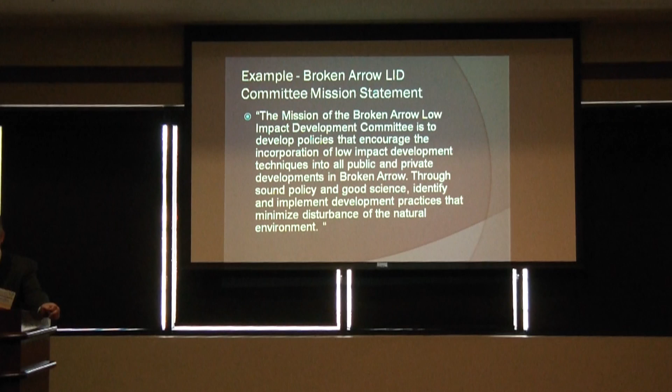So our committee got to work trying to narrow down hundreds and hundreds of possible LID practices down to 10 or 12 that we might want to emphasize a little more on the local level. The committee decided that a voluntary LID program for developers, with a local green certification and community acknowledgement, would be the way we'd look at it within the City of Broken Arrow.

Different Phase 2 communities may come up with their own emphasized practices and incentive programs. So in Oklahoma anyway, each community kind of goes its own way. That's a little tough with us, and that's why I really like to see a lot of the different communities participate in events like this - really good to look at it collectively as well.

Some things about our certification program: it's a voluntary program for developers, property owners, or even homeowners associations seeking LID certification. As mentioned earlier, with a lot of existing development you not only need to look at what you're going to do for new development from here on out, but maybe even retrofitting or getting existing homeowners associations and groups really looking at how they maintain their open space. So it's for both residential and commercial, existing or proposed.

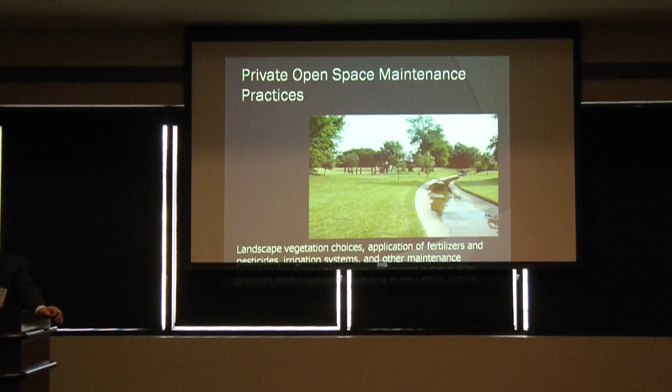Private open space maintenance practices - how do you handle that landscape? How much fertilizer do you apply? What pesticides do you use? Do you have low use irrigation systems? Those type of things - how you maintain the open space you have is a very important part of LID.

One thing in Oklahoma we all have a fairly good grip on, it seems like, is flood control. We have stormwater detention ponds - almost every new neighborhood has these, or we have large city regional ones. What can you do with them to help water quality as well?

That's one of the challenges engineers need to really look at. Do you have underwater aerators, pond fountains, pond forebay areas - things of that nature where the pond itself can really do some stormwater quality benefit as well as flood control.

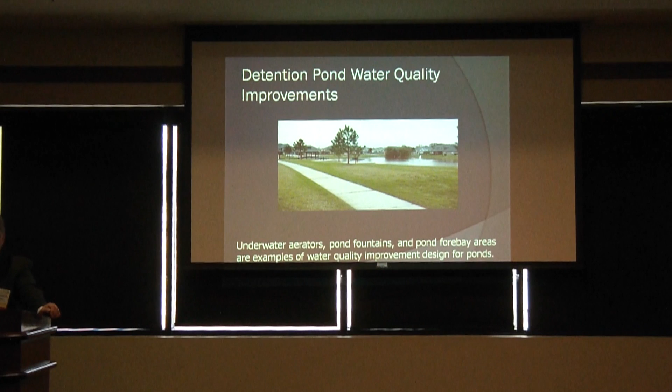Vegetated swales, another implement of LID. They can slow down the overland velocities, they act as pollutant filters, and they can add some open space to neighborhoods. One thing you really have to look at is making sure the designs are maintenance friendly to the owners, so you don't have standing water or nuisance or code enforcement issues created by this.

A big thing we look at that is always a big issue for those on the municipal side is when you have a very large tract - 40, 60 acres - cleared all at one time, scalping the whole site, clearing it, and then trying to manage the silt from leaving that site during construction.

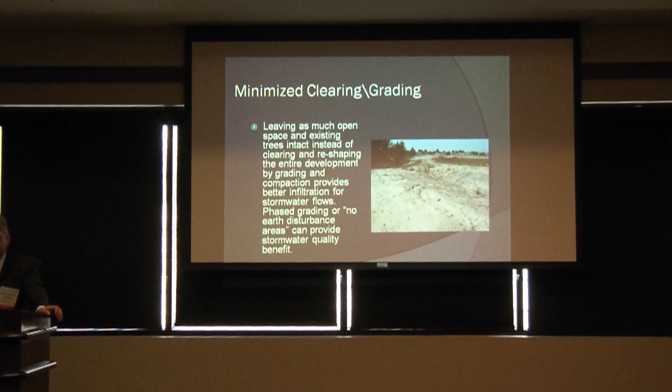So if you can do some things to phase projects so you don't disturb all the land at once, do some no-disturbance areas, and if you can try to leave some clumps of trees long term, that's a good thing to do as well.

Good housekeeping during construction - how well do developers and builders react to the pollution and erosion control changes to the plan? Here's an ugly picture from a Broken Arrow project where the development had tiers and tiers of silt fence, but you can still see the stormwater looking like chocolate milk draining right down to the storm drain. So when that happens, that has to be cleaned up.

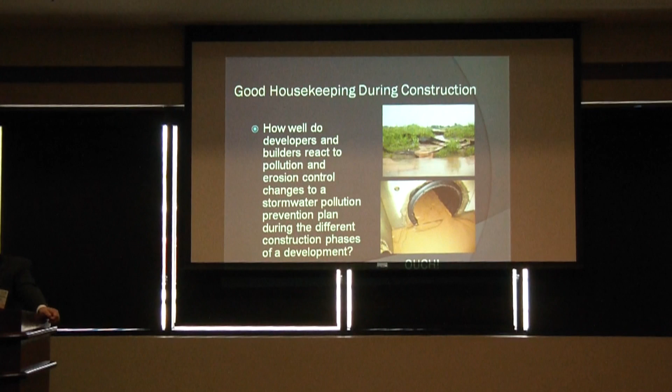So we just need to really look at some things you actually do during construction - it's a very critical part of this as well. Broken Arrow has a lot of construction going on at all times, so that's a really big deal for us.

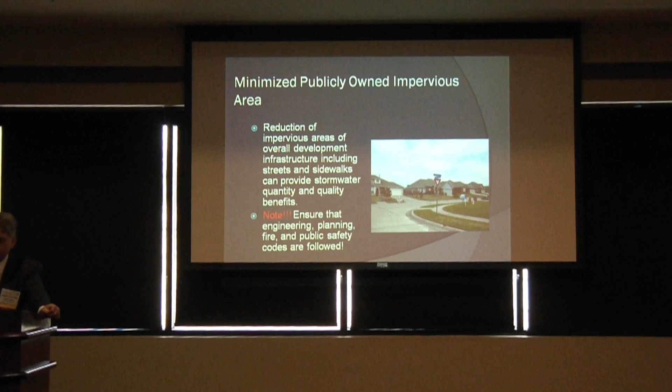A lot of what was presented before was about reducing impervious areas. That's something we really need to get a handle on for new developments, things such as narrower street widths. Broken Arrow has a code requiring sidewalks on residential developments unless it's a private gated community, so you've got to figure ways to reduce impervious area within the public right of way or on public facilities. We're looking at narrower street widths as a possibility, and we do have that capability within our LID practice manual.

One thing the city has done, even on public projects, is shown here: a roadway we widened 3 or 4 years ago, Lynn Lane, about 5 or 6 miles south of here. Instead of the standard 50-foot wide 4-lane width, we squeezed it down to 45 feet, which works out to about an 11.5-foot traffic lane instead of 12.5. I'd like to say it was for stormwater quality, but honestly it was to try to squeeze down the right-of-way purchase you have to make when you widen roads, dealing with landowners for that extra right-of-way. It can get very expensive, so reducing street lane widths can have other benefits too, like less pavement to maintain over the roadway's 50-year life. So there are a lot of benefits if you can squeeze just a little impervious area out of the roadway.

Then there's the issue of privately owned impervious areas. A lot of these categories are covered in our practices manual as things you can get credit points for. For private residential subdivisions, you often have walking trails, private driveways, homeowners association parking areas, and other private impervious areas. There are things that can be done to reduce the impervious area or improve the stormwater quality benefits. A pedestrian trail would be a great opportunity to experiment with pervious pavements and things of that nature, so that's something we're really wanting to encourage.

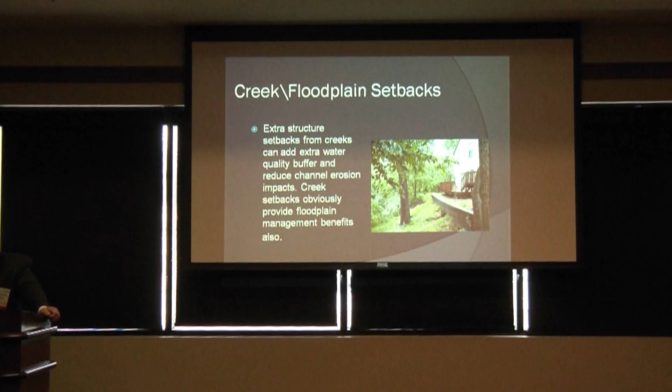Impervious surfaces disconnection. If you do have impervious area on the development, try to disconnect it and not tie it right to the street, then right to a storm sewer, then right to a paved flume and then right to the creek without it ever touching a piece of grass. Get that roof drain going across the vegetation somehow, some way.

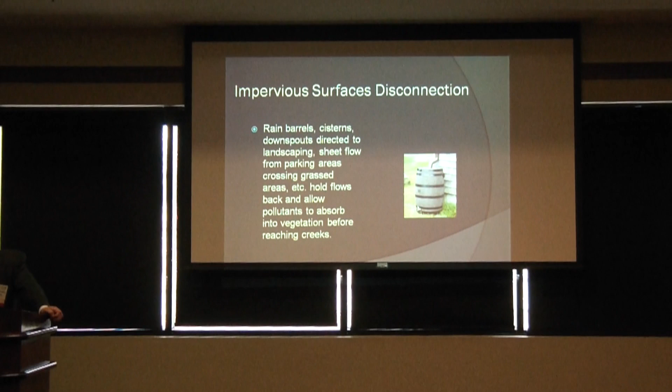Do some things like rain barrels or cisterns to try to reuse some of that water, possibly get it back into the ground instead of watering your yard with tap water that's treated at the water plant. So you can do some conservation things as well that help not only stormwater quality but also water conservation, which is becoming bigger and bigger.

Trees: tree preservation, planting, and landscaping. The arborist will really tell you there are economic and social benefits of having trees on a development. So if you can save trees that are on a site and design around them as much as you can, that can have a great benefit.

If you do have to take most of the trees out on a site development, if you can replant some, it can really have some good air quality benefits, just aesthetics. This can really add some value to the land if you make sure you have a good tree program.

A lot of cities do have landscape requirements, and this is the kind of thing where a lot of developments are already doing types of things like tree plantings or landscaping, but we want to give them some stormwater quality benefit points for this certification, so that's an important thing to focus on.

Of course, rain gardens, bio-retention filters—there are a lot of presentations here today that will mention those. They can be on a very private, individual lot level, or they can be larger rain gardens that take a little bit more concentrated flow, possibly from street systems and such. But emphasizing draining that stormwater through systems like this to really help the pollutant load drop is a good thing.

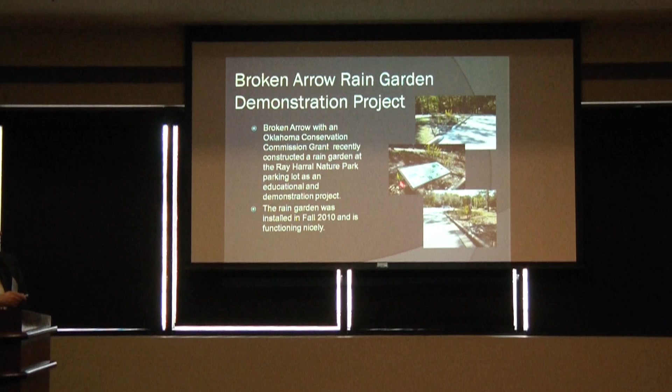There actually was a public education component to it. We got some signage up there since this is a nature park, so it gives an educational process to it as well. It's a really successful project, and it's functioning very nicely.

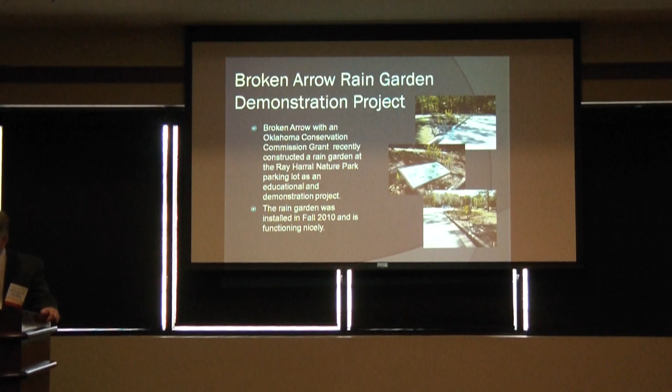One thing a lot of us municipal folks have is stacks and stacks of brochures—all these stormwater quality brochures. One thing that could be beneficial is a good system to get these out to new homeowners. If a new subdivision came in and wanted to be green certified at the subdivision level, you could maybe have a system where each new homeowner got a stack of these stormwater quality brochures and things like that.

Some things like to distribute even a bit more of the education—not just brochures, but other methods as well. Just educating the end users of the development on the importance of taking care of your open space, and the implications of things you do on the homeowner level, like washing your car in your yard or picking up your pet waste or things like that. Just getting a little bit more of that aha moment in some people's heads could really help out.

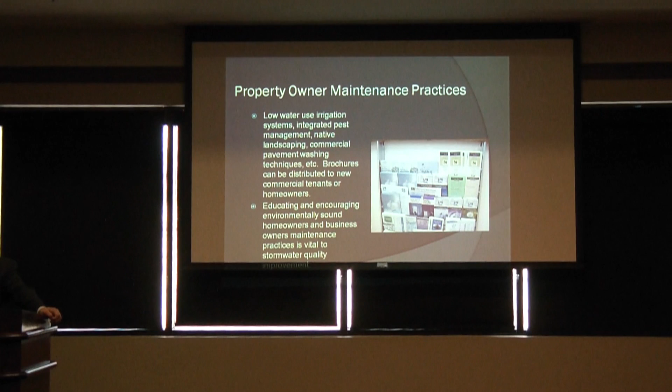Good housekeeping during construction—we'll give a little bit of extra points if you do some things above and beyond the DEQ minimum requirements. Just a little extra, maybe reporting of inspections and things of that nature, to try to get a bit more professionalism, a better grip on the construction site, siltation, and erosion control.

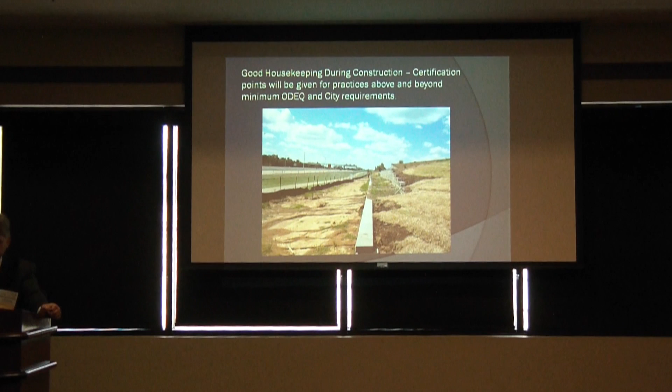Open space maintenance practices, not only on the residential side, but even on the commercial and business side of things. How do they pick up the trash on their side? How much fertilizer and pesticides do they use? What kind of irrigation systems do they have? Do they have material storage that can be an issue? All different kinds of things on the commercial and business side can also affect the stormwater. So we wanted to write this practice for not only residential but commercial and all types of development that have different issues.

Low water use irrigation systems can have some benefit for water reduction and conservation. Less steady flow of water running right down to the creek, or wasted watering rolling out to the street, things of that nature. Try to get people to look a little better at their irrigation systems for their lawns and landscaping.

Find ways to reduce tossed and blowable trash. You hear a lot about pollution, but even just the trash that blows around from commercial areas can be a big deal. I deal with floodplain management all the time, and I meet with creek owners who say, why should it be my job to pick up the trash that people dump, when it flows into the creeks and lands on my property? Well, it landed on your property, it's your problem. Realistically, I don't know a great solution to this, but there needs to be more thought given to trash collection where it's scattered, especially in commercial areas, so it doesn't all flow right down to the creeks, where as we know, it really does end up.

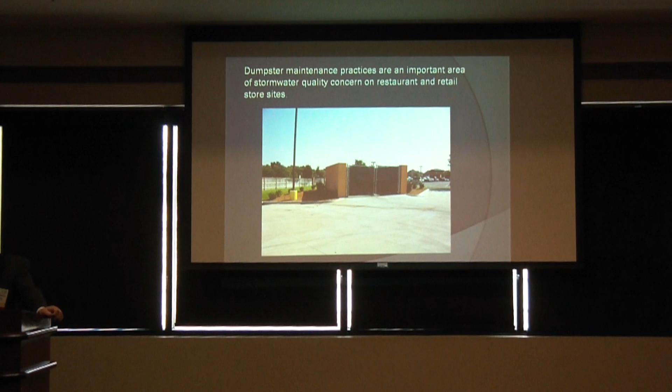Dumpster maintenance can be a big issue. I do all the development reviews for stormwater here, and I always look at where they're going to put their dumpster. I've seen a few where they say, oh, I'll put the storm inlet right by this dumpster - no, that's not a great idea. Let's try to get a little common sense about the side impacts of where the trash dumpster is, where the grease traps are, and other issues that can impact stormwater. Try to get them thinking about that kind of thing.

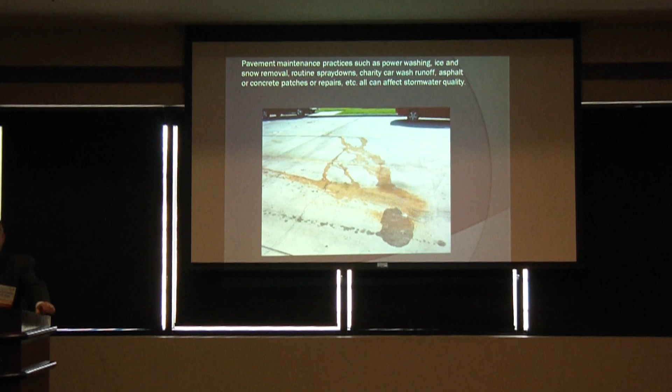Pavement maintenance practices - power washing, ice and snow removal, routine spray downs, charity car wash events, asphalt patches - a lot of those issues. If you just get owners educated a little bit about some of these issues that can have stormwater impacts, that can really help out.

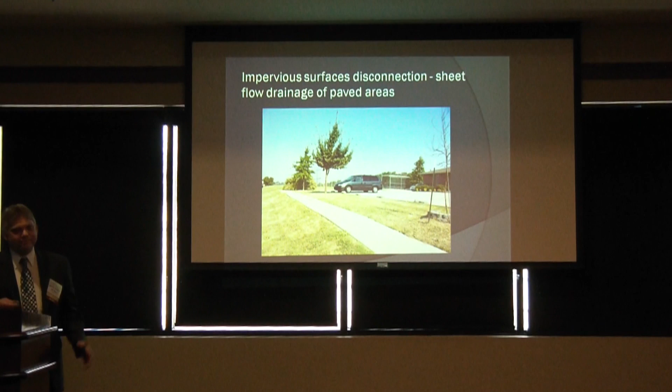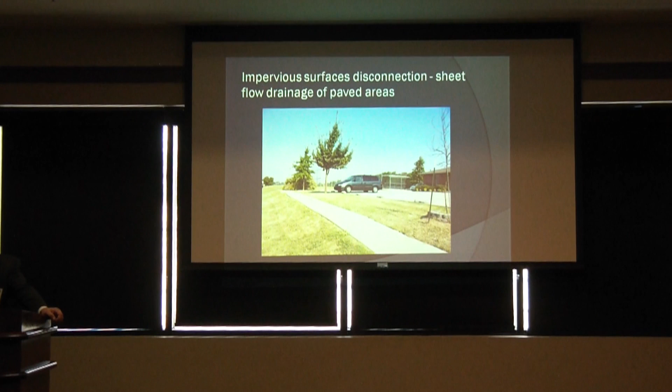Impervious surfaces disconnection - not only can this apply to residential, but this is a picture of an office building in Broken Arrow, and it wasn't an LID design. This was put in 10, 15 years ago, but you can see the parking lot just drains as sheet flow, actually crossing the sidewalk before it drains down to the street. For civil engineers, this used to be a big no-no - you collect that in the curb and pipe it to the storm system. You don't do that, are you crazy, why are you trying that? But this works, and simple things like this on sites can really help out big picture-wise for stormwater quality control.

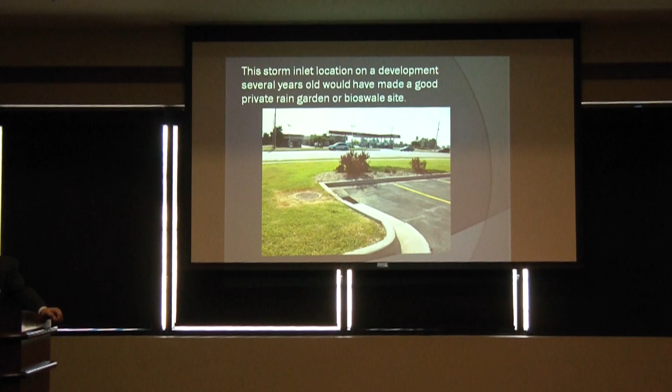So our committee did get our manual created in 2010. Let me give you a little bit of what this really is - it's just a general guide of LID practices that we want to encourage in Broken Arrow. It's a resource for developers, design consultants, and property owners.

It is not a design criteria manual. I mean, I don't tell you how you're going to build a rain garden, and that's what conferences like this are helpful for, to really get some of the pervious pavement specs and rain garden designs and things like that. So it's not really a scientific document to tell you how to measure the water quality impacts, or a thorough best management practices catalog.

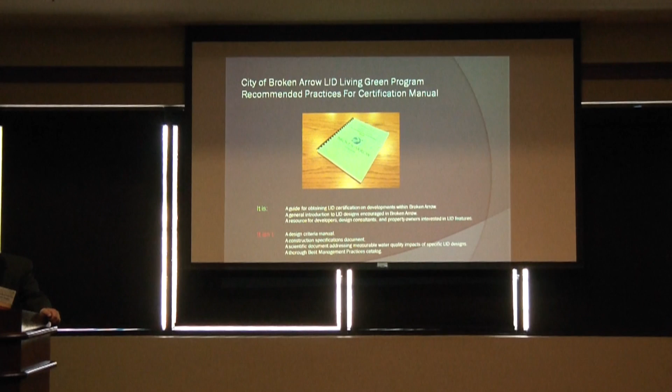It's just really a green certification to get development headed that way. I think there's a lot more work still to be done at the state level and individual cities to really get those kinds of things going.

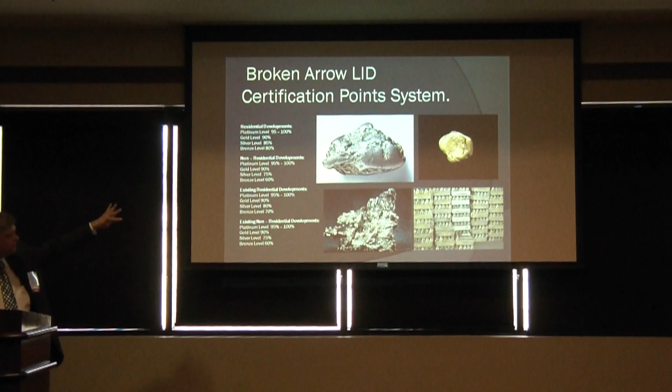So I'll just kind of fly through these. This just shows that we have different levels of certification: platinum, gold, silver, bronze. We have it for residential developments, new non-residential developments, existing residential, and existing non-residential developments, so four main categories. This gives you a little more detail of all the different types of things we're looking at. It's like a cafeteria of different things you can pick and choose for your site, whether they're applicable or not.

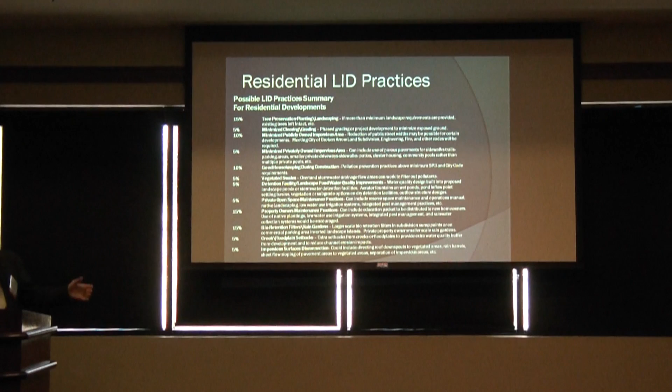If you have a detention facility, you can do some things; if you don't, you just don't pick that one. So you pick the things applicable to your site that you can get points credit for, and you work it out with the city on the application. We have different ones for non-residential, emphasizing a little bit different things here and there for residential versus non-residential.

And we do give certification for existing developments. Here are some more examples showing a bit more level of detail. We do have this on our webpage if anyone is interested.

Okay, what's the impact then? We put this together back on Earth Day, 2010. We had two certifications done right from the start: one was an existing residential development, one was an ongoing commercial project. Since that time, we haven't had any.

So we've had some public education come from this. I just think of that line from Field of Dreams: if you build it, they will come. Not in this case. We're not seeing developments or even commercial businesses really jump at the chance to get a little green certification.

This is a voluntary program. So what is keeping developers, engineers, and consultants from seeking this? Is it just extra design cost they think? Or a hurry to get the project done? Unfamiliar LID design practices, fear of long-term maintenance issues - there's a lot of things out there. We're still trying to figure out exactly what the drawbacks are on a voluntary LID program.

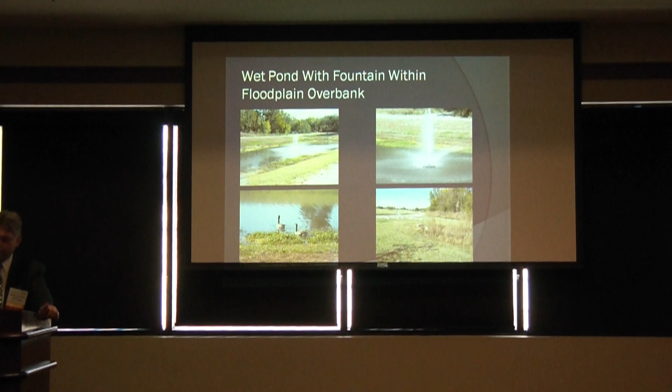I'll fly through some of these. We had a demonstration project, a park project where we did some creek erosion control issues, but in an LID kind of fashion. We did a gravel access road to the creek side instead of paving it, to keep things as natural as possible, keeping as many trees in the overbank of the floodplain as possible. We did a fountain and aerators in the pond that was constructed for extra flood volume and small flow detention within the floodplain. We have 404 permits, so we have some pre-planning mitigation.

We designed the parking lot for this low-intensity park around the trees; we wanted to keep those in place. We just let the sheet flow from the parking lot go right down to the creek instead of curbing it and piping it down to the creek.

So we tried to do some LID type features on this park, to try to preserve the water quality in streams.

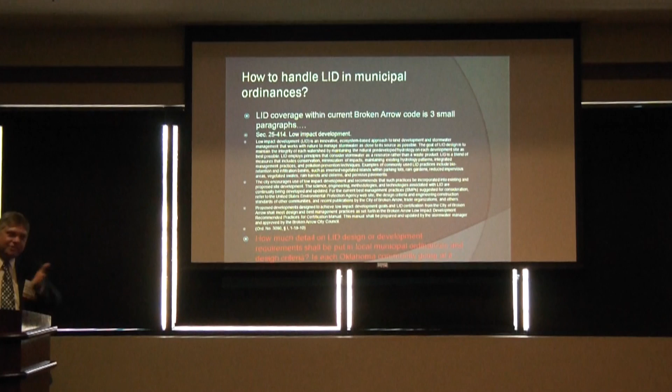Real quickly, as a policy thing, our code really just has 3 little paragraphs on LID. The first paragraph just describes what it is. The second just says we're going to encourage it—we don't really have specs for it. And the third says we have a practices manual. That's where a lot of communities in Oklahoma are at. We don't have very much code written in our ordinances about LID. That's the challenge, to try to get together and figure out how some of those things are being done.

Encouraging this contest that we're in. One of the sites is in Broken Arrow that you'll see in the contest later today. So we want to really participate in the contest as much as possible.

It's a new approach. There will be new techniques and experimentation required. You need all different types of government officials, property owners, and consultants to get on board. They'll have floodplain benefits as well, and just some common sense things that engineers can really do on their flood design. It has a lot of overlap with stormwater quality.

So with that, I'm wrapping up and hopefully getting you guys to lunch here. Yeah, I think maybe one question—anybody? Okay, quickly: have you had anybody in your development community actually tell you why they don't want to participate?

Not really. I go to every single pre-development meeting for any new development in Broken Arrow, and I bet I've pitched this thing 80 to 100 times. It kind of falls on deaf ears. It's all real—they don't say they don't like it, but they don't say they're going to do it either. I think everyone's just busy trying to get going.

We'll let Lindsay Rouse go ahead—he may be able to answer some things there.

First of all, I'd like to say Broken Arrow has been great, in Oklahoma anyway, for being at the forefront of leading people towards low impact development. You guys have done a great job. Some of our surrounding communities in the metropolitan area, I think, need to grab a page from the Broken Arrow playbook, so to speak. I think part of it, frankly, is education.